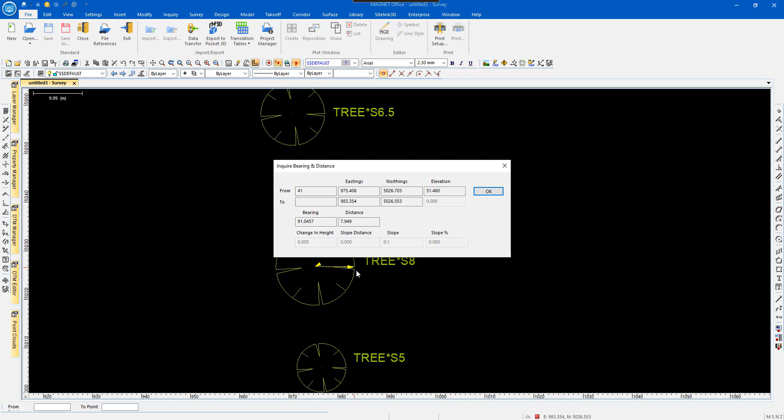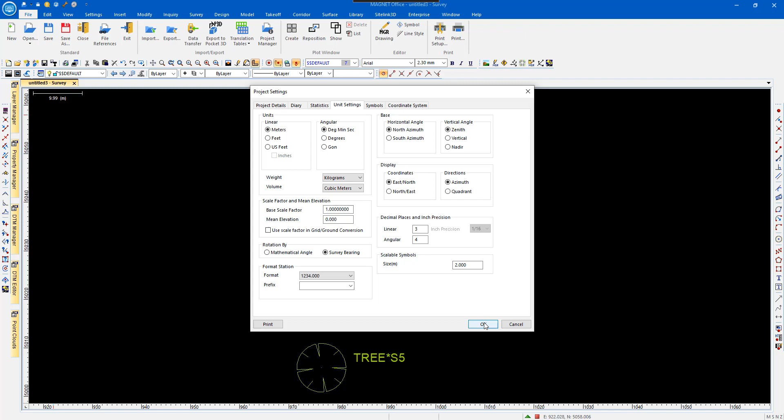So basically it means that if you have in your project settings the scalable symbol set to 2, then it's based on radius. By default it's set to 1, which means diameter. So pick and choose how you apply scalable symbols, whether it's by diameter or by radius. Changing it from the default of 1, which is the diameter, to 2 means it's then radius applied. Okay. So now we've got ours set to radius, and here we have our scalable symbols.

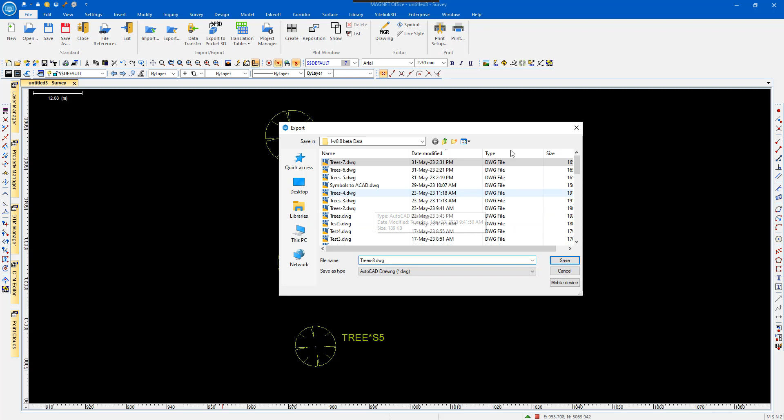So what I'm going to be doing is exporting these through to AutoCAD. So I'll just go export, creating a new file, and generate this AutoCAD drawing file, which is basically using the default settings you have when you go to export to AutoCAD. It's based on active. We're exporting the points as Magnet Office point marks or symbols, and exporting annotation as text, because we've got that as annotation for a code. So then go OK to that.

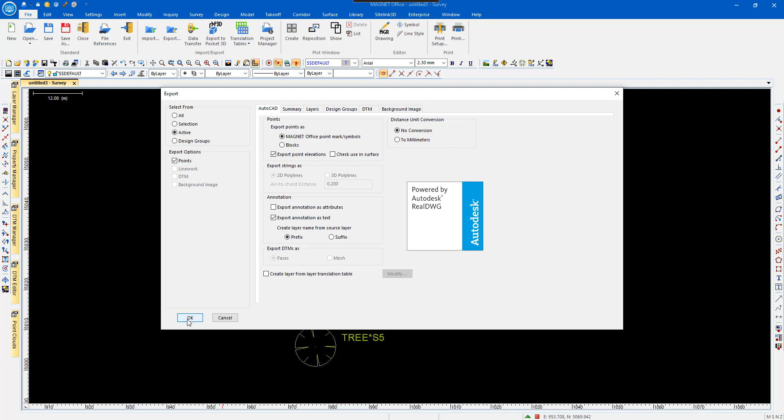And now I'll open up my program called DraftSight, which basically duplicates what's in AutoCAD because I don't have a full license of AutoCAD. But I'll open up my new drawing, which is in this folder up here, and open that up.

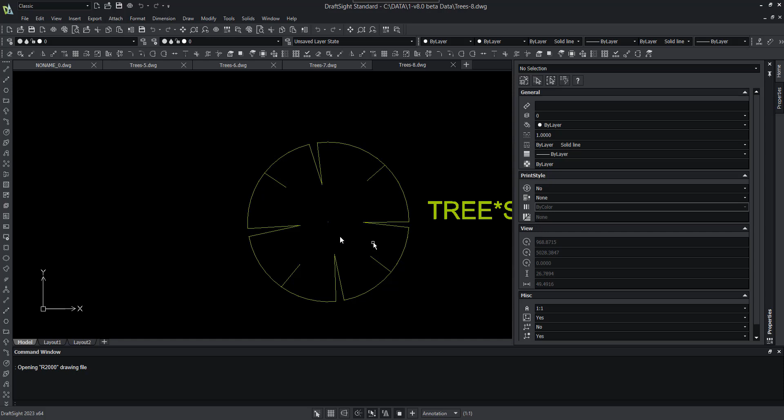Now if I select a tree like this one here, this one 8 meters radius, it will show the radius as shown in here. So if I had left my scale units as 1, then that value up there would be 4, based on the radius from the center point out to the outer edge. So because we've got that set as 2 in our project scale settings, that is 8 meters radius, as measured out in Magnet Office from the center of the tree to the edge of the foliage.

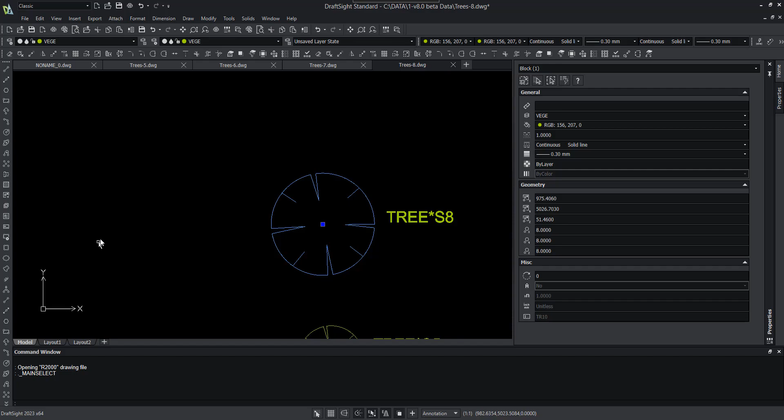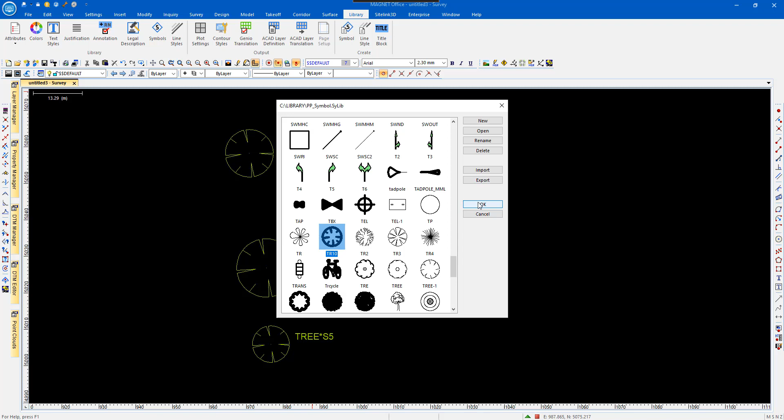Now how we achieve this is, if I flick back into Magnet Office, you go to library and then select your symbols. I'll scroll down to my tree symbol, that's the name of the symbol there as you can see, and select my TR10 symbol, which is the one I use for my global codes, for my tree coding, and open that. Now there's that symbol in my symbol library. So what you do is go edit and select definition.

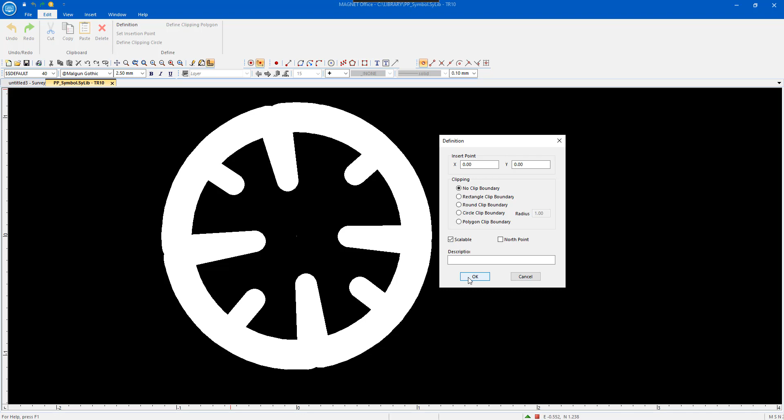Now, in my definition, if I click on circle clip boundary, the radius or unit is set to 1. That's important. It must be set to 1 to be scaled correctly when you interchange from Magnet Office over to AutoCAD. So it's set to a radius of 1 and it's ticked as being scalable. Okay. So that's a very important thing. Make sure the symbols that you use for scaling, such as trees or whatever, have the unit size set to 1.

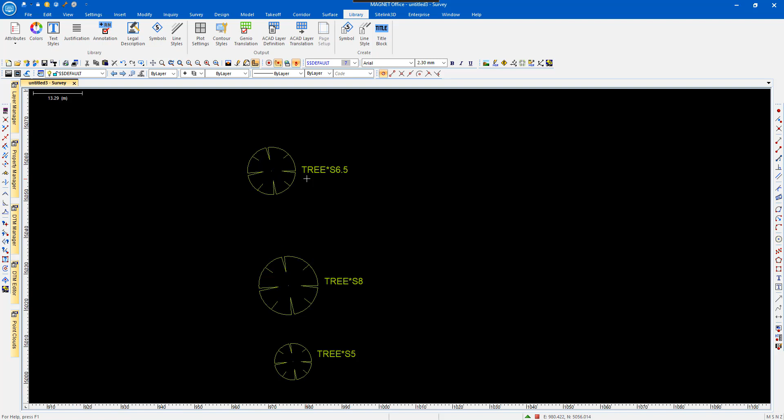And that's basically it. That's how you get scaled symbols within Magnet Office to go through to AutoCAD correctly and scaled at the right size. Okay. Thank you.